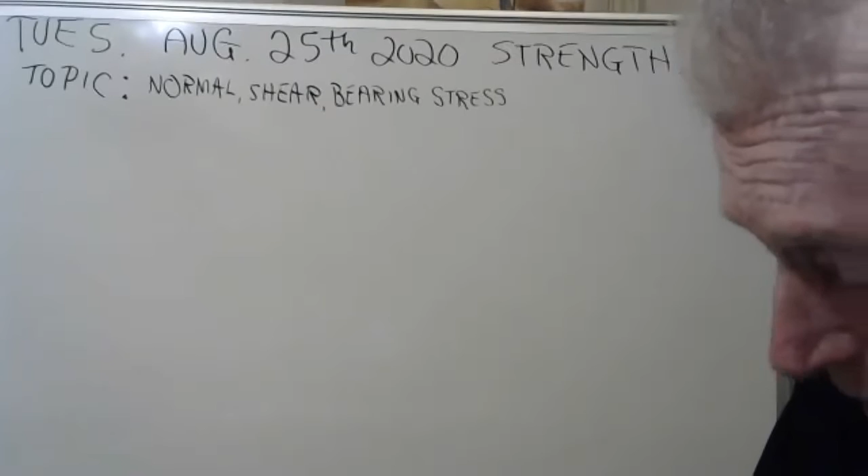We're going to talk about stress. That's the big topic in this class, you know, stress.

Hi, Mr. Griffin. Hey, good morning. Is that my friend Ashley? No, this is Mohammed. Who was that? That was Mohammed. Hi, Mohammed. Hi. Let's see who else we got here.

So, can you go over the homework problem 1-11? Now Mohammed wants to talk about 1-11, right Mohammed? Sorry, 1-14, not 11, 1-14. Let me find it, just a minute. What page is it? Hold on. Page number 55. Thank you so very much.

You're welcome. Now it's part of your homework, but I don't mind, we can talk about homework, it won't hurt us any. I can do the whole thing, or I can just answer part of it. What seemed to be your problem with 1-14?

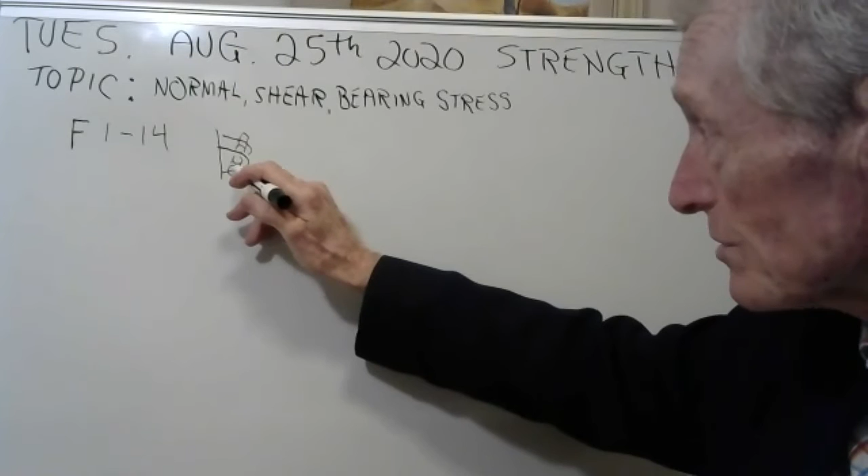Yeah, there's a connection here at A. There's the artist rendition of it, and see, it's got two brackets. Is that showing up on there? Yeah, it's got two brackets, and then the pin goes through those like that. Kind of hard for me to draw that, but I'll try. See, there's a pin through there, and then there's this member. There's another member that's coming out this way. That's AC. AC is out here.

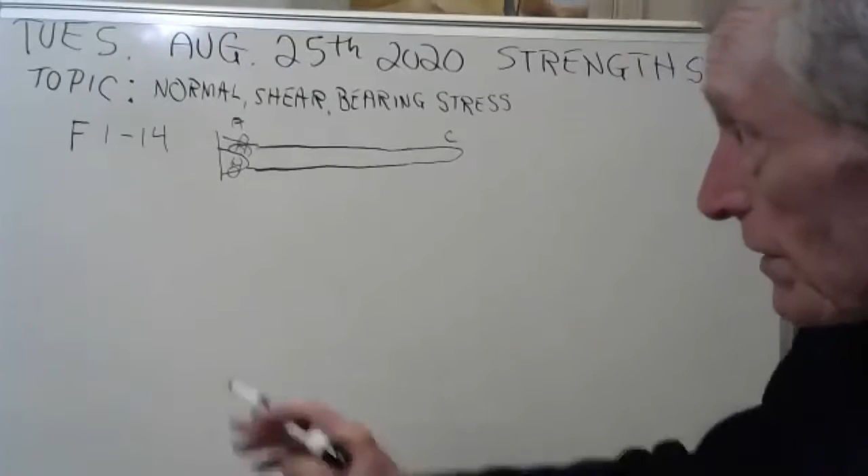Kind of hard for me to draw there, but I'm trying. Do you see how they have two brackets? And so when you go to get the shear, trying to remember what the force was there. Let me see if I can remember. I think you have 800 pounds and 600 pounds at A.

And we can go through that if you want. But see, if you have 800, 600, and you take the square root and do all that, you will get 1,000. So to get the shear stress at A, you take 1,000 pounds, and you have to divide it by the area. But see, you have two areas because there's two brackets. So you go 2 times pi, 0.25 inches squared, over 4. See, you have two of them because you have two brackets. And when you do that, you'll get your shear stress.

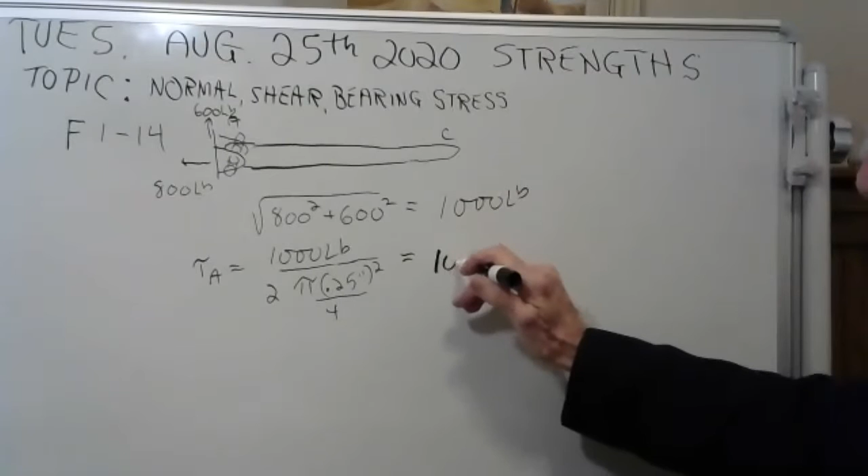Well, I got an answer. I wonder if it's right. I'm getting 10186 pounds per square inch.

Let's look in the answer book and see what the answer is to F1-14. They said the shear stress at A is 10.2 K. This is wrong, this is pounds per square inch. They said that it's 10.2 KSI. Well, that's what that is.

Hey, we got the answer in the back of the book. How about that? I skipped a bunch of stuff there, Mohammed. Are you happy with that now? Do you understand it now?

Yes, it was just confusing because in the diagram it wasn't showing that at A there's like two pins, it was just showing this one pin. That's why I was confused why they're dividing by 2. You okay now? Yeah, I'm okay now.

Anybody else? I can go through it more if you want. Just speak up, anybody that needs help. I've got a wonderful class here. Let's see who we got here. Oh, big class. Muhammad, Alex, Nicholas, Ashley.

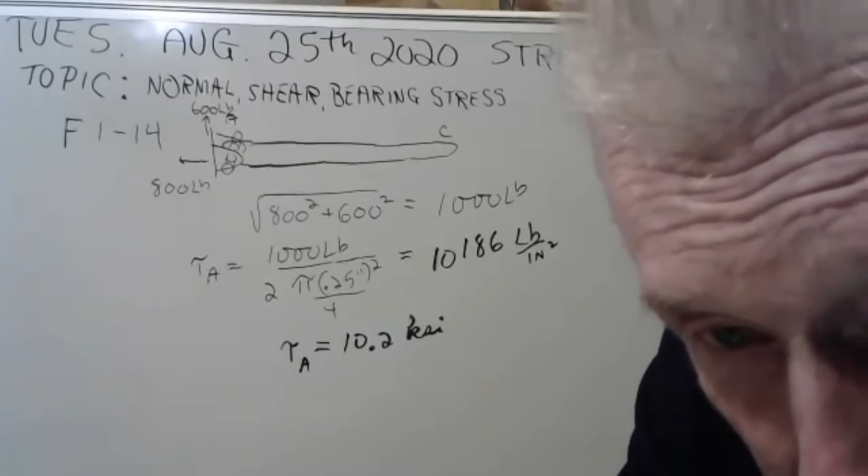Why did we take the magnitude of 800 squared plus 600 squared? Why did we do that? Do what, Mohammed? Why did we do what? Why did we take the square root of 800 and 600?

Oh, okay, well I'll be glad to show you that. And look at all these wonderful students - Noah, Julian, Jackson, Darren, Chase. Let's show you that.

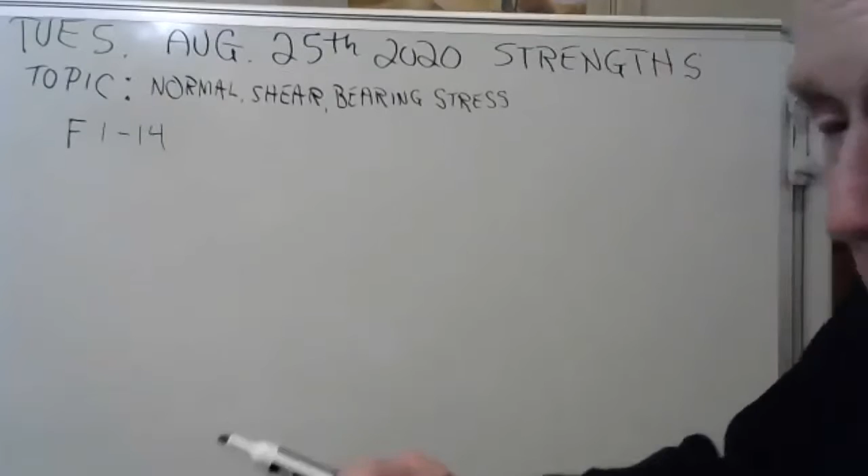Right now I'm helping you with your homework there. However, just a minute, when's that homework due? Let's see - F1-14, oh that was due last night at midnight. So that's okay, we'll go over it. But it was due last night at midnight, I believe.

But see, what you have to do is find the external forces first. So here's this. Oh gee, did I forget my protractor? Doggone it. Well, I can use this ruler here.

Now you know, when you do your work, you're supposed to have some kind of engineering paper. Now I don't think you can see, but this has got a grid on it, it's real cheap graph paper. It doesn't show up on there, sorry. But I bought a pad of this for 88 cents at Walmart, or you can buy that expensive engineering paper if you like.

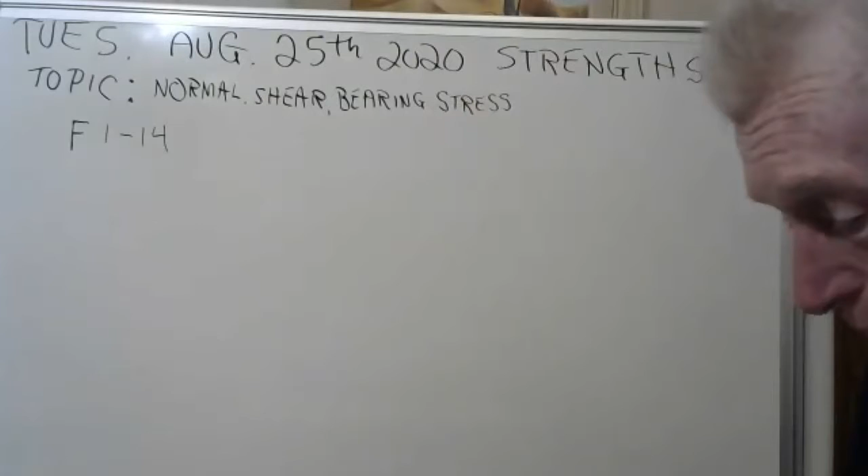But first you have to find the external forces. Now the external - if this is 4 feet, let me draw that. Okay, 4 feet. Well, we use inches, I guess. Okay, there's 4 inches, and then there's 3 inches down here. That puts me to right there. And here's your other piece right here.

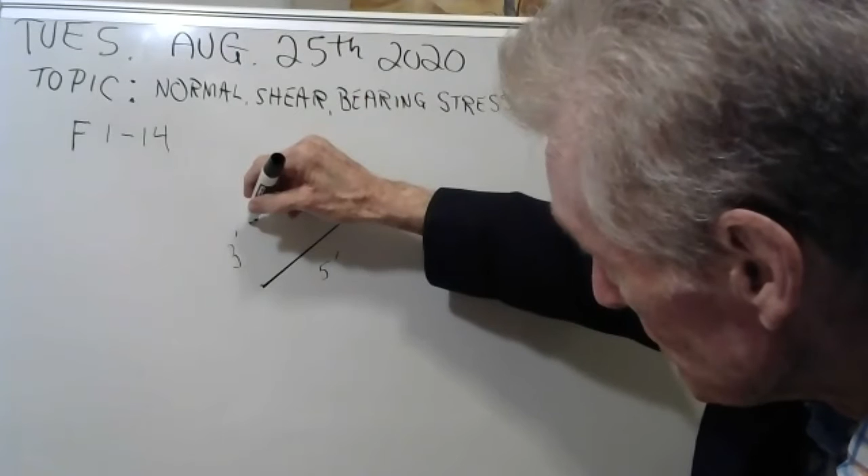See, this is 3 feet, this is 4 feet, and of course that's 5 feet. That's your 3-4-5 triangle. And here's your double brackets, remember I was telling you about those? Yes, those double brackets there. There's a single bracket here. There you go. And then there's another member right here. Let's label all this stuff A, B, C, D, and E.

Okay, I did it to scale. Do you do your work to scale? Well, you're supposed to. Now let's find all the external forces. See, first you find the external forces, or external loads, you could call them. And then from there we'll go to the internal loads. But first you have to find the external loads.

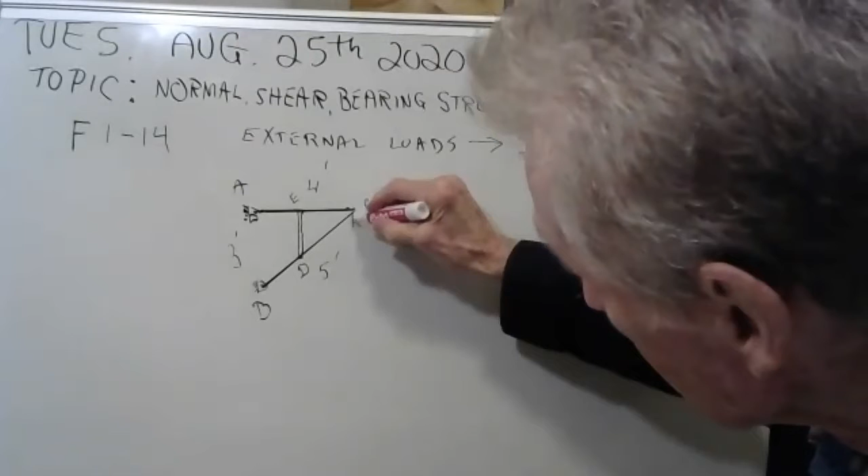Now I like to put my forces in red, so I've got a red marker here, and they said this is 600 pounds. Does that show up red? Kind of.

Now wait a minute, I goofed up on this. This is not a bracket, this is a rocker. It's a rocker, and it can only give you a normal force. It can't give you an up and down force, it can only give you a normal force. So I'm going to draw the normal force in red. And then the other force has to go here.

Do you remember me telling you, you draw your free body diagram and you look for zero, two, and three force members? Well, this structure is a three force structure. Three force structures or three force members are either concurrent or they're parallel.

Maybe I should write that down again for you guys. Three force structures are either concurrent, or else they're parallel.

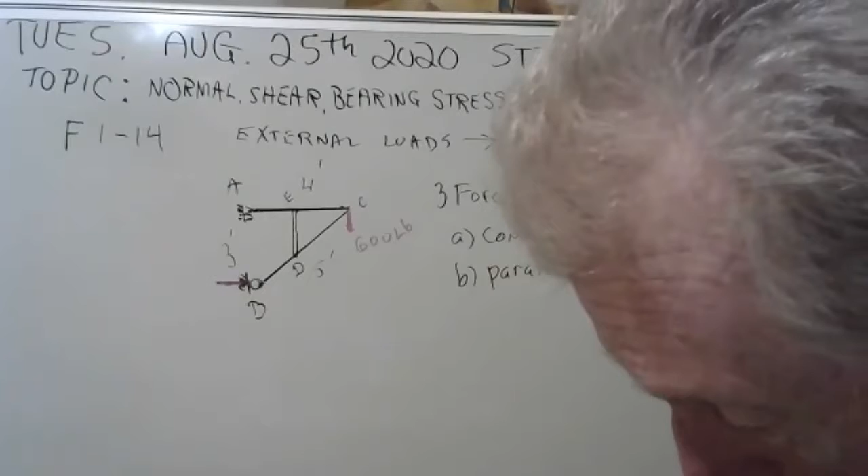Now let me ask one of my excellent students here. Let me pick on Shane. Unmute, Shane, and I want you to tell me something - I want you to tell me what this word means, concurrent. Do you know what it means, Shane? And if you don't, it's not the end of the world. I'm not sure. That's okay, we'll pick on Noah. Unmute. Do you know what that word concurrent means?

Unmute Noah. Earth calling Noah.

Does it mean they're all through a point? Yes, good going Noah, proud of you. Now do you see how these forces here, these two forces here, go through that point right there? That's the concurrent point. If you have a 3-force structure, all the forces have to go through the concurrent force point.

Well, that means the force at A has to go through the concurrent point. And so A is doing this. There's your force at A.

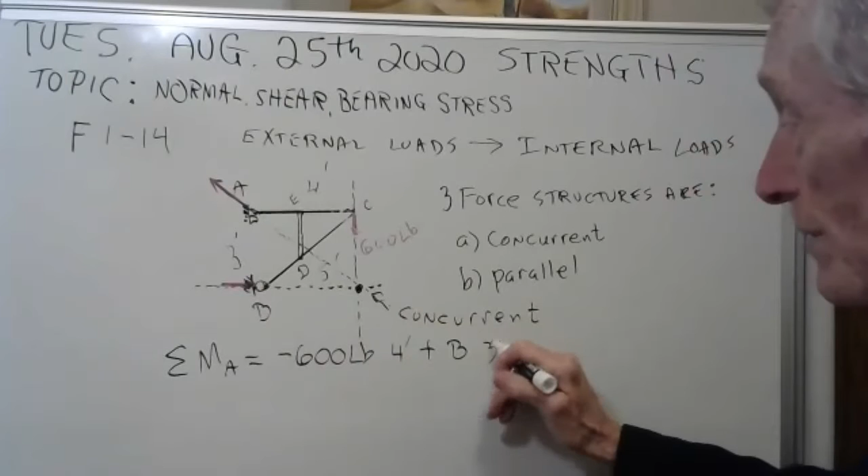Now we're going to find out what those forces are. The way you solve for forces is you take the moments about A, and you have a negative 600 pounds times 4 feet, and a positive B times 3 feet equals 0. You solve that, and you'll discover that B has to be 800 pounds.

Now what that means is the component of A has got to be 800 pounds going to the left. If this is 800 pounds going to the right, this has got to be 800 pounds going to the left. Now you see that 600 pounds going down? That means A has a component of 600 pounds going up.

Now Mohammed asked me how I knew that A was 1,000 pounds, and I wrote it out for him. I took the square root of 600 squared plus 800 squared, which is 1,000 pounds. He wondered how I got the 1,000 pounds. Well, that's how. These are the components at A, so that means A is 1,000 pounds.

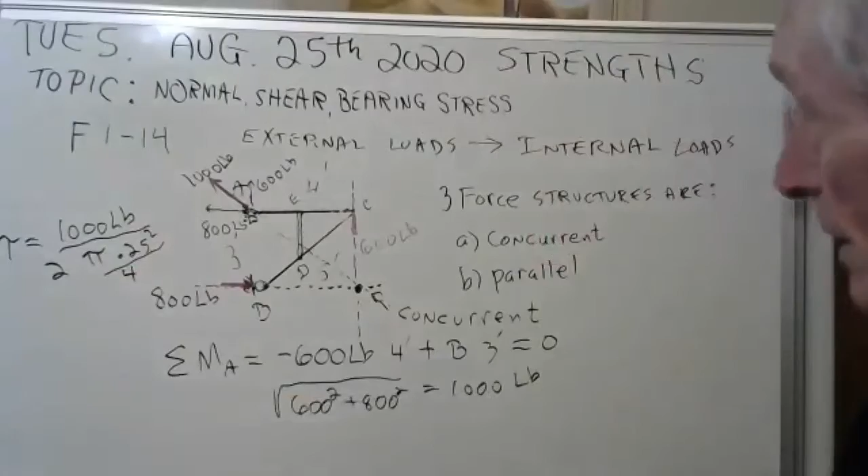And so when you go to find the shear stress at A, it's 1,000 pounds divided by 2, because there's 2 brackets, over pi times 0.25 squared over 4, and you will get the answer. We had it on the board, but I erased it. Let me do it again. 1,000 pounds divided by... okay, I got an answer. I got 10.2 KSI, and that's what the answer book says.

Mohammed, do you understand now? Yes, I got the problem, sir. Thank you so much. Yes, thank you. Anybody else?

Anybody else? So you're all happy? The topic today is stress. See, we found the stress, it's 10.2 KSI. But what does KSI mean?

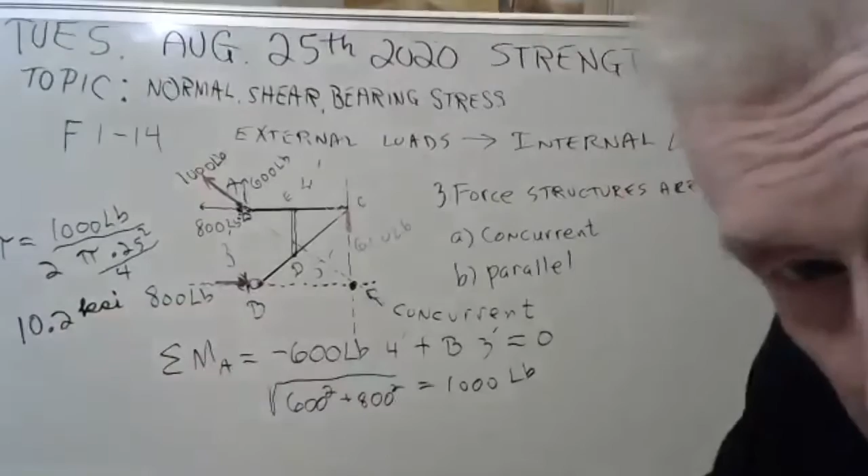Let me ask one of my excellent students here. How about my friend Samuel? Samuel, unmute and tell me, what the heck is a KSI? Is it kilopounds per square inch? That's it, he's got it. It's 1,000 pounds per square inch. Good going.

Excellent. Anything else from anybody before we have more fun?

No? Notice there's a method in this stuff. You make a free body diagram to scale. Hey, I measured that stuff, I got me a ruler. Look, I got a ruler and I measured stuff. That thing is done to scale.

And then what? Then we found the external forces in this case, and I put them in red. Put your forces in red. Then I looked for three force members. Well, the whole thing is a three force member, so it's concurrent. That helped me, see? That helped me a lot. Now I was able to figure this force at A is 1,000 pounds.

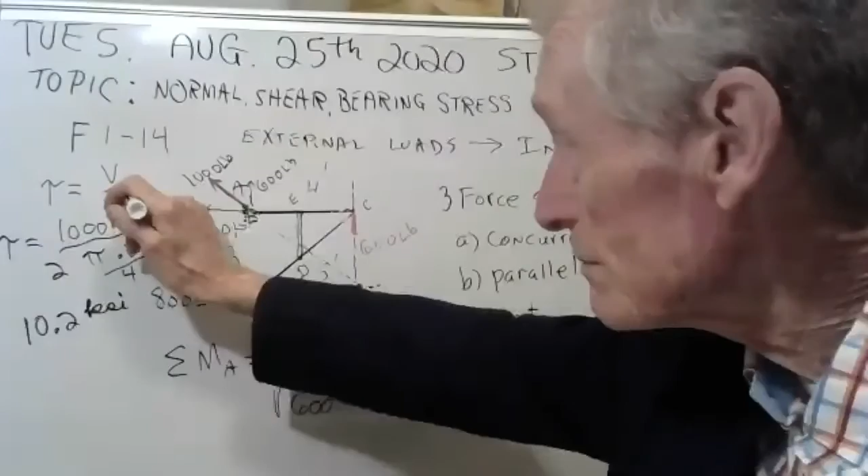It has components. And then you can go for internal loads. Now what they wanted was the force on the pin. Well, there's 1,000 pounds on the pin. That's internal, and so you can get this shear stress on the pin. You know the formula, you know how to do shear stress. It's V over A. That's internal. Shear is an internal force, and shear stress is force divided by area.

Okay, well, if you're happy with all that, we'll do something else. Here's your chance, go ahead and ask me something. Anybody? Otherwise we're just going to keep doing stresses here. Okay, well, let's do this one. Make some room here, but that's the plan.

Which one do I want to do the most here? Let me think.

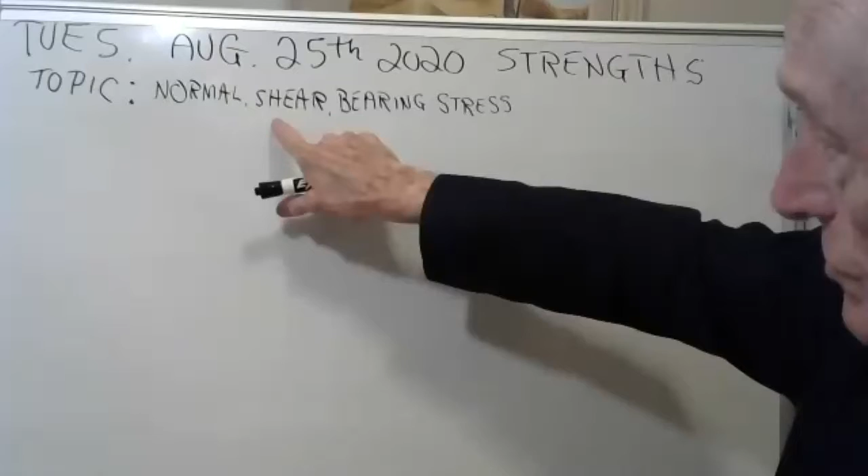You've heard of normal stress and shear stress, but I don't think I've told you about bearing stress. Well, let's talk about bearing stress. That won't hurt us any.

Look at problem 171. Let me see if I can find that. 171. Hey, there it is, I found it. We're going to look at problem 171, and it's got bearing stress.

It also has normal stress. But they've got a pin there. It's a bolt. No, it's a bolt. And it's got a nut and two washers. Okay.

Bearing stress is 2 KSI. Tensile stress is 18 KSI. That's the maximum. We want the tension in the bolt. We want the maximum allowable tension in the bolt.

Well, all right. Let me draw this bolt. Now there's a bolt. Artist's rendition of the bolt here.

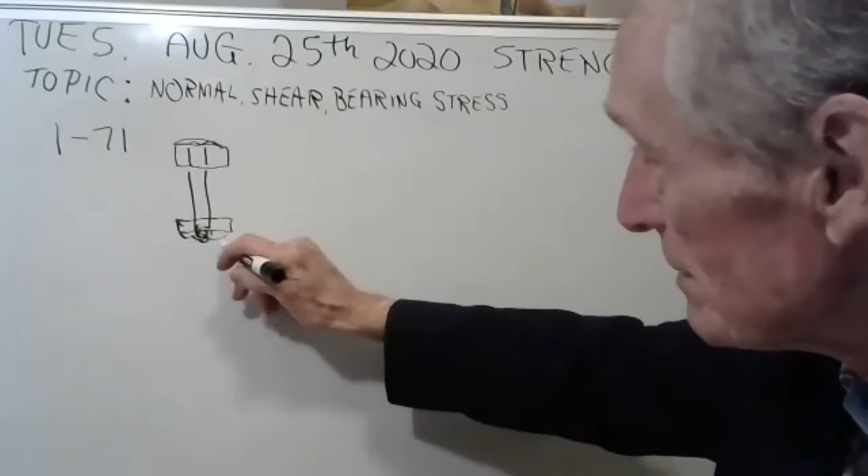Of course, there's going to be threads on the bolt, and then there's a nut. There's a nut. Of course, those would be dashed lines there inside, wouldn't they? That kind of gives you a feel for it. That would all be hidden away there.

Let's look at the forces on that bolt. Oh, wait a minute, I forgot the washer. There's a washer here and another one here, right? Yeah, there's a couple of washers here.

Okay. Now I get the feeling like maybe we're tightening this up. See, there's a screw here, and there's a nut. Here's the nut, and we're tightening that nut up, tighter and tighter.

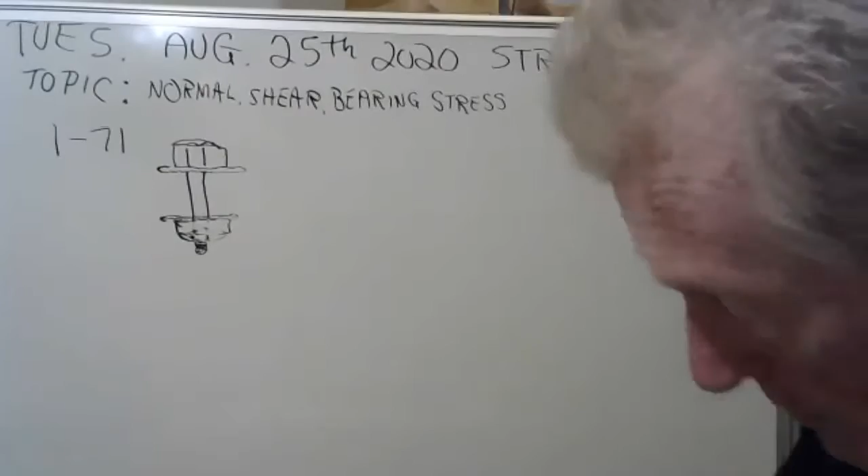And you know what that does? That stretches the bolt, because you've got these boards here. You got this board here, and you got this board here. And you're tightening this nut, and it stretches the bolt.

In fact, the bolt comes down a little bit. It comes poking down through here a little bit as you tighten it, as you screw that nut, and it puts a lot of tension on the bolt.

Okay, that's normal stress. The normal stress on the bolt is going to be the normal force on the bolt divided by the area of the bolt. Now let me read this. And they said that the allowable tensile stress is 18 KSI. Well, that's this here. That's their maximum that they're going to allow, is 18 KSI.

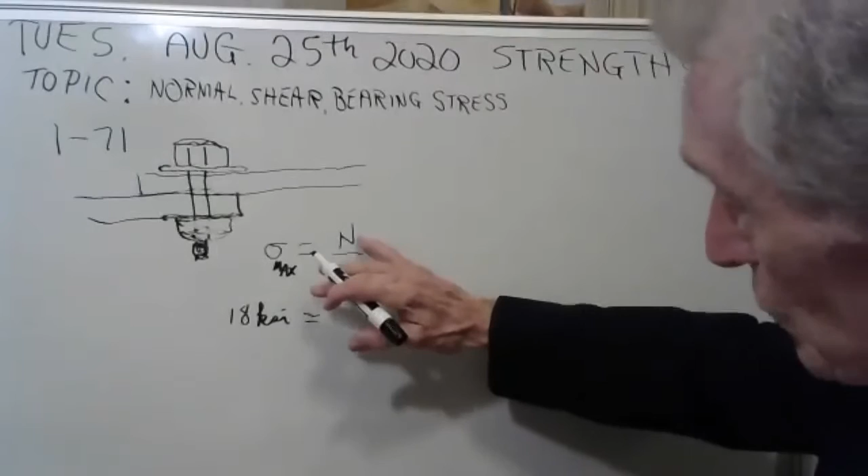And what are we supposed to find? Determine the maximum allowed tension in the bolt. Well, that's what this is. This normal force is tension. That's tension. It's a force.

In this case, pounds. So we're going to find it. Now the area of the bolt is pi over 4. Now what's the diameter of this bolt? 0.31 inches.

So we have us an equation here, and we can find the tension in the bolt. They don't want us to tighten it any more than that. And they want to find what that maximum tension is. Well, you got calculators, you can do this as well as I can. Go ahead and do that. I'll call on one of you.

I'm going to do it. I'm going to find this tension. You can put T there instead if it makes you happy. But it's tension. Here goes. You do it.

Well, I found the maximum allowable tension in the bolt on my calculator. And let me ask my friend, Noah, unmute. Have you got that yet, Noah? Have you plugged this in and gotten the maximum normal force there? It's tension, Noah.

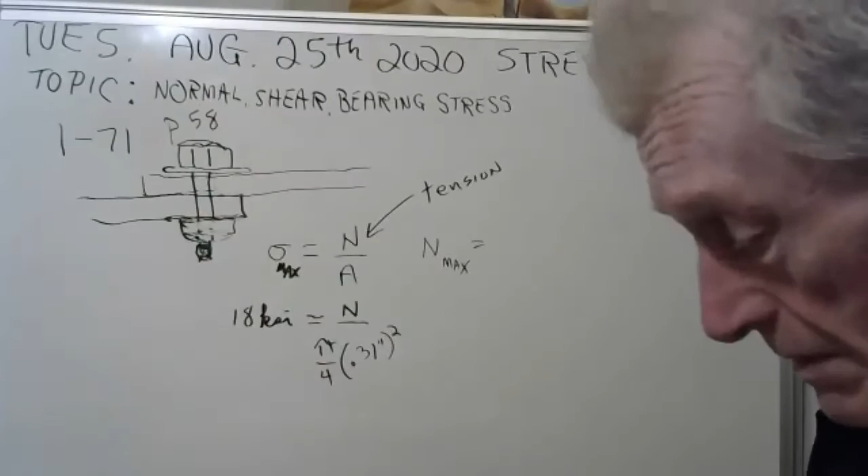Well, that's not what I got. Let's see, we're trying to solve for this n here, Noah. What you do is you take 18,000 and then you multiply by this stuff here. Oh yeah, go ahead and do that. And tell me what you got.

I got, let's see, 1,358. That's what I got. Now those are in pounds, Noah.

Now, if they wanted it in kips, Noah, do you know what a kip is? Yeah, isn't that 1,000 pounds? It's 1,000 pounds. So there's the answer if the tension in the bolt is the problem.

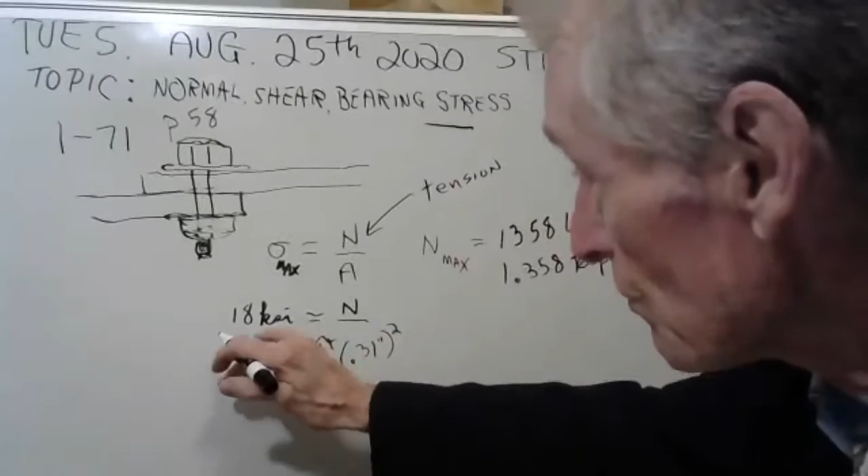But we also have to look at the bearing stress. See, this is normal stress here, and in fact it's tensile stress. We just looked at the tensile stress, and we found that if you have this 1.358 kips, you've just maxed out the tensile stress, and you might have a problem with the bolt. But we also have to calculate the bearing stress. So let's do that.

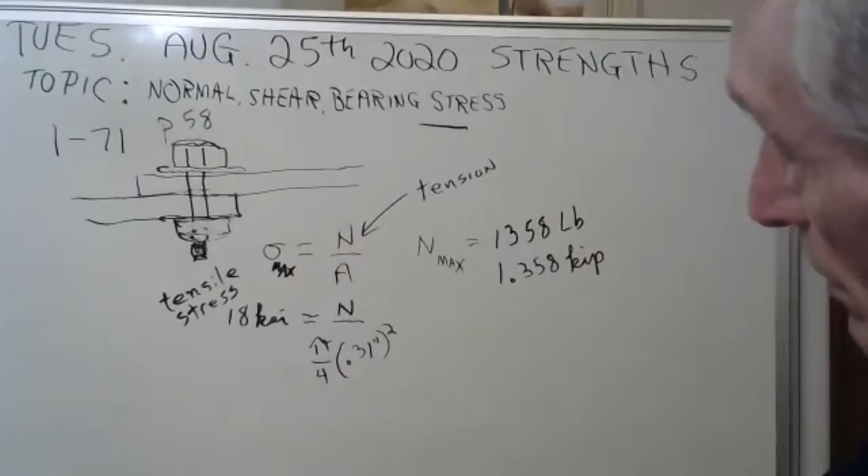Now you see this washer here? As you tighten that bolt and start squeezing these boards, they look like they're made of wood. Is it wood? Board. It says board, so they're made out of wood. What happens is, if you tighten it too much, you'll start kind of making an impression in the wood. Here, I'll try to draw you what I'm talking about here. I need some room here.

See, here's this board, our artist's rendition of this board. As you tighten that bolt, that washer will push itself into the board and make a kind of indentation. It's hard to draw, but our artist view tried to show it pushing into the board, and if boards are pretty soft, it might just make an impression in the board there.

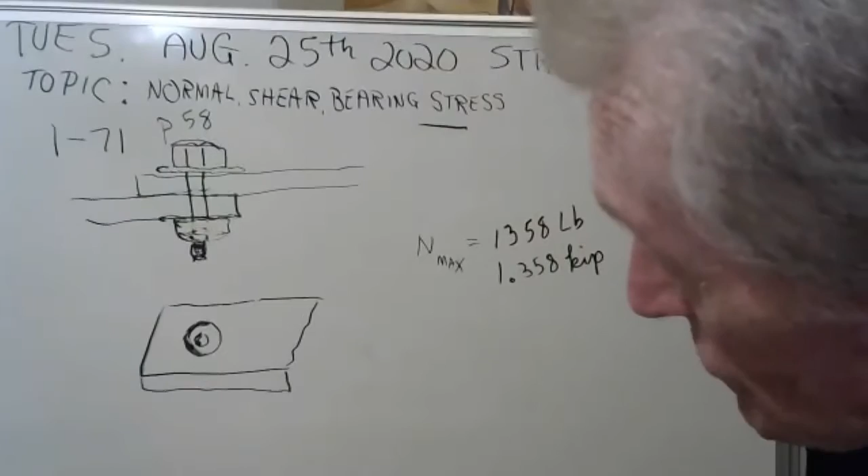And they call that bearing stress. Bearing stress is when you have a normal force acting over an area, and on that board it can make an impression that looks like a washer shape on the top of the board. Of course there would be one here too, there's a washer down the bottom, so there would be an impression on the bottom board as well. I hope you understand that.

And here's the formula for bearing stress. It goes like this: this is your bearing stress, I'll just call it 'bear.' That will be the normal force divided by the area of your washer. Now the area of the washer is pi over 4 times 0.75 squared minus 0.5 squared.

They said the outside diameter is 0.75, inside diameter is 0.5, and they told us the maximum bearing stress is 2 KSI.

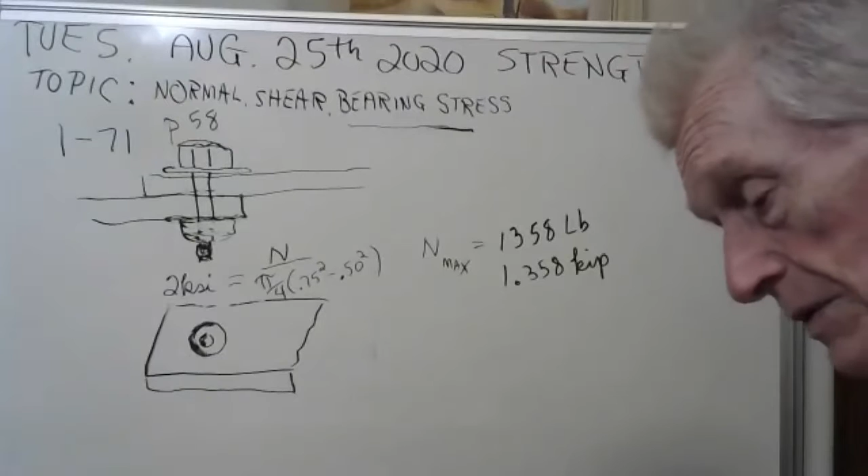So now we have this lovely equation here, and we're going to solve for the maximum force in the bolt that you can allow so you don't wreck the boards. You don't want to have a washer-shaped hole there in the boards. So get your calculators out and do that, let's see what you get. I'm going to try it too, and I'll call on one of you. Get your calculators, solve for the normal force.

And we'll get the maximum force that you can have in your bolt. I got an answer. Now let me go to one of my wonderful students here, Julian. Unmute, have you got that yet, Julian? I got 490.87, that's what I got. We'll just round it off.

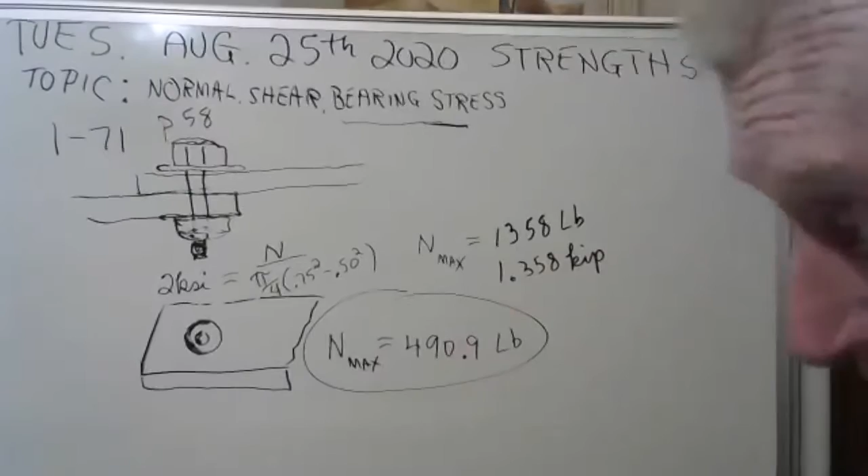So if you get 490 pounds of tension in that bolt, you're on the verge of having a problem with bearing stress. Now, of these two, the 1,358 pounds or the 490.9 pounds, which is the correct answer? Well, this is the correct answer because as you tighten that bolt, you'll get to a tension of 490 pounds long before you have 1,358 pounds. So the problem in this case is with the bearing stress. It's not that the bolt has a problem, it can handle a lot more tension, but that soft wood is going to be wrecked by the bearing stress, and this should be the answer.

Okay, let's look it up, problem 1-71. Go to the back and we'll see how we did. Here's what the answer book says: they use P, I don't know why, but some books use P as just a dummy variable for a normal force, and they got 0.491 kips. Well, that's the same thing as what we got. We got 490.9 pounds, and the book says 0.491 kips. Yay, we did great.

So now we've talked about bearing stress. Mr. Griffin, do you know why we subtract 0.75 from the... minus 0.5? Oh, thank you for asking.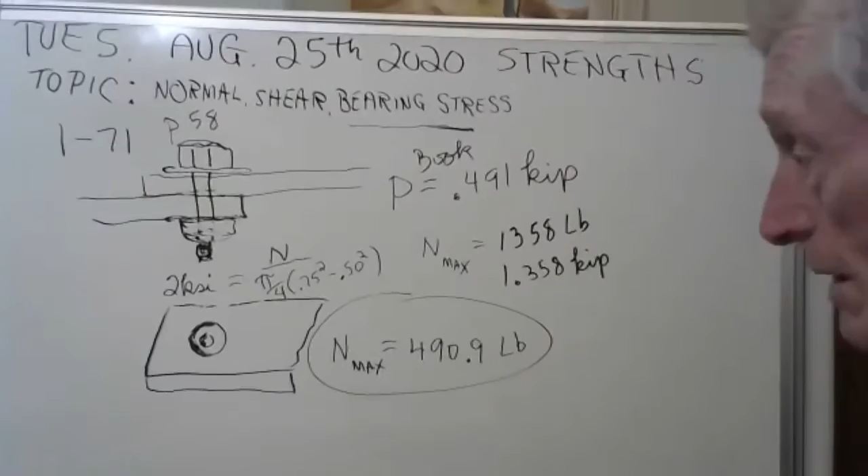See, we're trying to find the area of a washer. Now if you just had a circle, the area would be pi over 4 times 0.75 inches squared. But we have a hole in it, there's a hole in this circle, it's called a washer. So what you have to do is the area of that washer is pi over 4 times 0.75 squared, minus the area of the hole. This is the area of the hole, and this is the area of the outside circle. The hole isn't there, it's made of metal, it's called a washer.

Do you understand, Mohammed? Yes. I'm waiting for that yes. Yes, I'm saying yes. Yeah, is that yes meaningful? Yes, you got it. Yeah, I got it. Yes, all I got right. All right, good. Okay, well let's do something else, that was fun, unless there's a question.

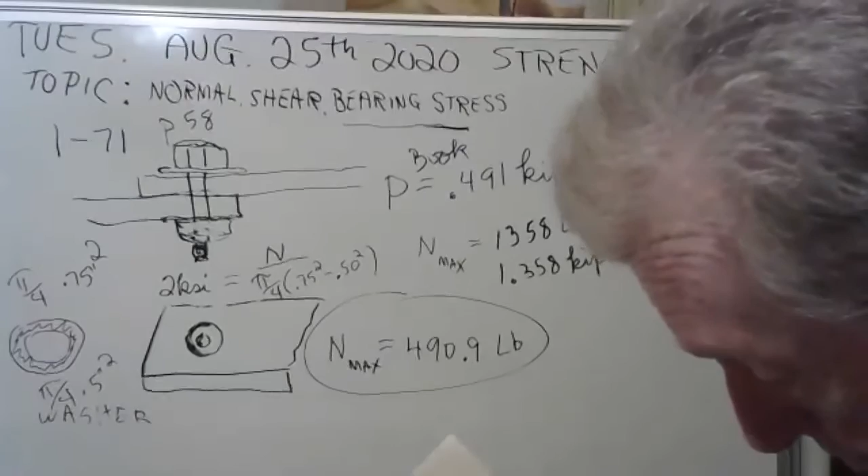Okay, we'll do something else. Let's do this one here.

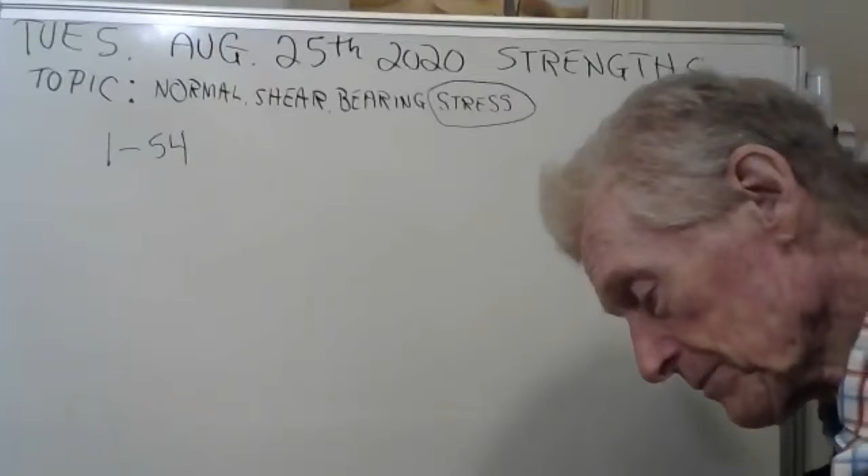Okay, now this problem here is 1-54. Before I do 1-54, let me go back and show you some basics here.

Let's suppose you had a rod under tension. Got a rod under tension. Let's call this area here A sub 0. It's a perpendicular cross-sectional area.

And let's section this. We're going to section it like this, maybe, yeah, like that. And there, this would be internal. We'll put a dash line there. See these dash lines?

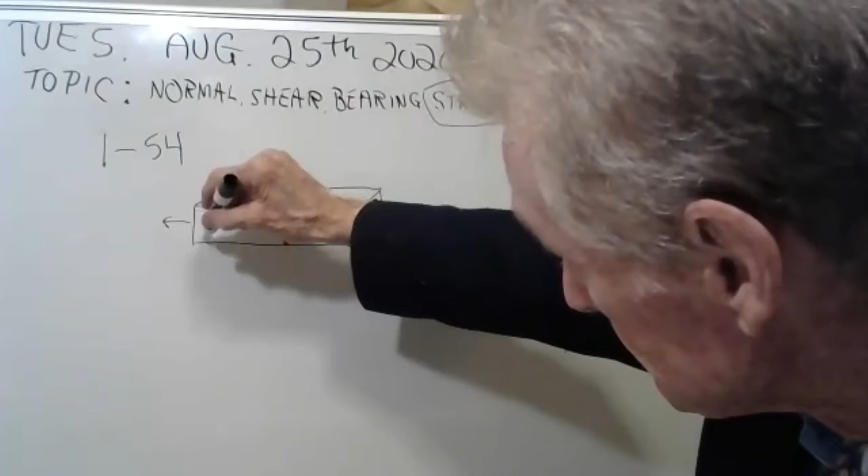We want to find the normal force and the shear force, I'm sorry, the normal stress and the shear stress on an inclined area.

Okay. Now I picked an angle here of 30 degrees to make this fairly easy for us. See, I picked an angle of 30 degrees. And let's just pick this angle. Let's just say this force is P. The book likes to use P for normal forces.

The normal stress is going to be, well, we know what it is. It's the normal force over area. And the shear stress is the shear force over area. We know that.

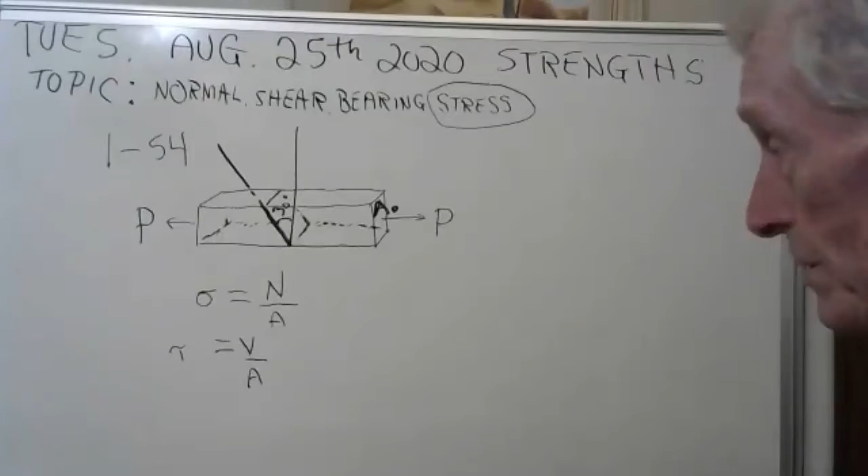But if it's at an inclined plane like that, how do you find the normal force? Well, see, the normal force is going perpendicular to that area like this. See that normal force? And the shear force is going parallel to the area like that.

Let me draw those forces separately. Let's suppose this is P right here. So you can break this down into components. This is called the normal component. And this is called the shear component. And those two will have to add up to P.

I'll tell you what the normal component is. It's P cosine, in this case, of 30. See that angle 30? That's that same angle 30 there. Can you see that? And this one here is P sine of 30.

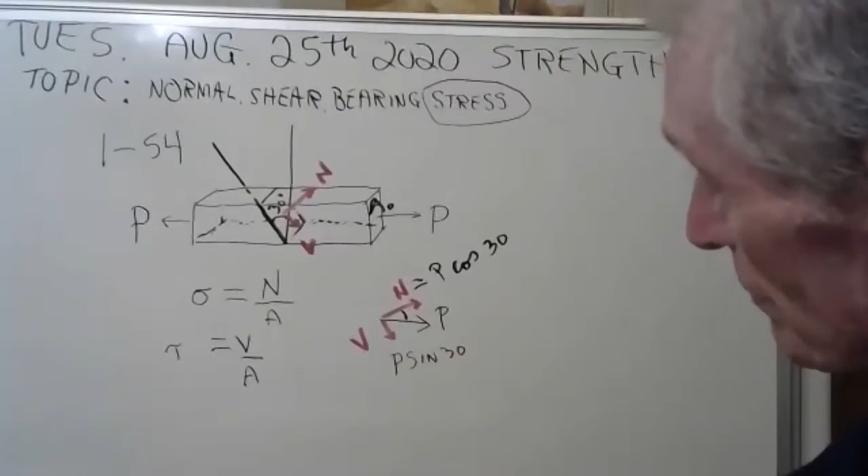So we made some progress. We know that this is going to be P cosine of 30 divided by the area, and this is going to be P sine of 30 divided by the area. But see, this area here is bigger than the cross-sectional area. This area here is equal to the cross-sectional area divided by the cosine of 30 in this case. You could show that with trig.

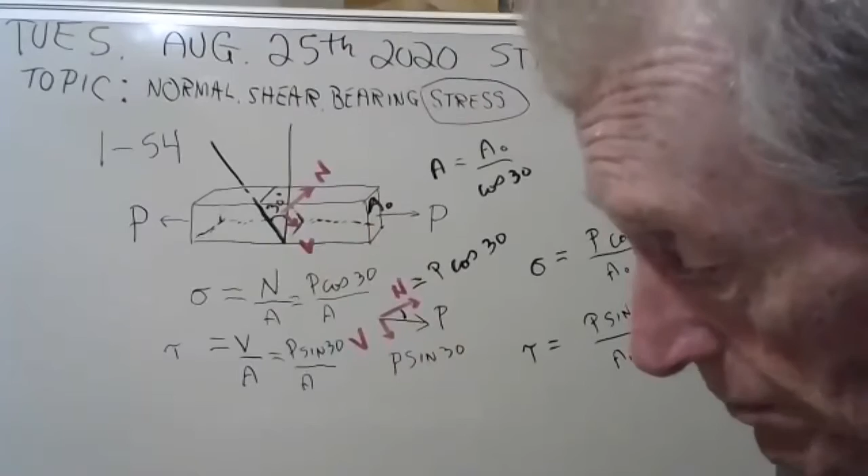And so when you solve this, you get the normal stress is P cosine squared of 30 over A sub 0. And tau is going to be P sine 30 cosine 30 over A sub 0. I skipped a step there. But I'm going to give you the equations for a slanted area internal to a member under tension.

And in fact, this is the equation where theta is just a dummy variable. So let me write that for you. And then we'll work a problem. But I needed to go back through that with you.

The normal stress on this slanted area is equal to the external force cosine squared of theta, where theta is this angle here. See it? Divided by A sub 0. The shear stress is P sine theta cosine theta over A0.

Why don't you write these equations down in your notebook, someplace where you can get to them, and we'll practice them. We'll solve a problem.

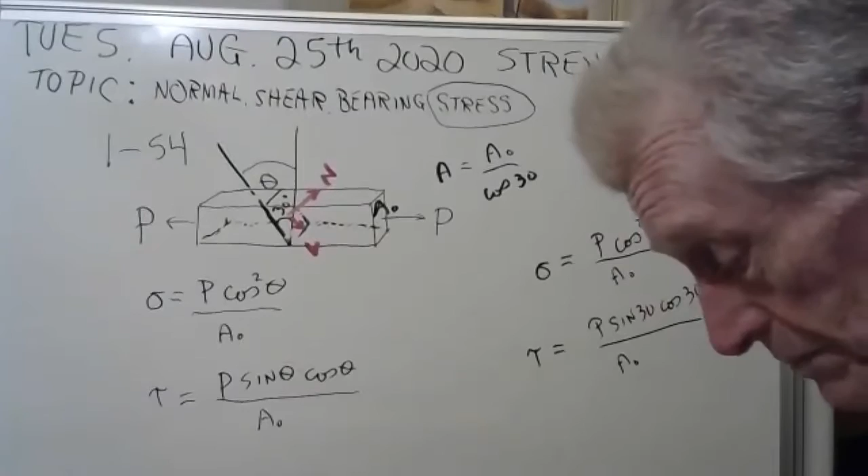I thought we'd solve problem 1-54 first, and then we can solve some others. Did I lose everybody? Give me some feedback. Are you okay with that? Yeah, it looks pretty good.

Okay, well here let's do this 1-54, or maybe another one, so that we can feel confident about this. We've got our equations now. Write these down. Write those equations down. Now this angle theta is, if you take a perpendicular cross section, the angle with whatever internal surface area that you want. You've got to know that there's shear stress and normal stress inside a piece like that.

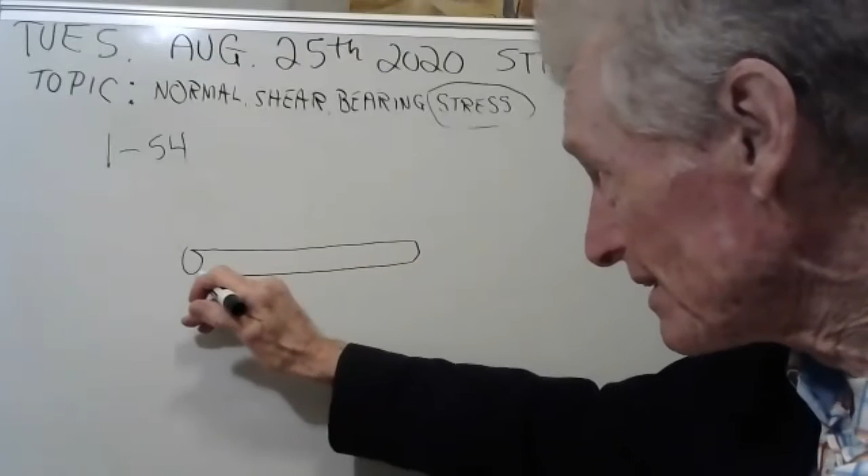Even if you just had a circular cross section and you put it under tension, get yourself just a steel bar, circular cross section, and pull on it on both ends. You have normal force inside, obviously. Obviously, you have normal force inside, but did you know there's also a shear force inside? And there's normal stress and shear stress inside.

It turns out the maximum shear stress is at an angle of 45 degrees. The reason for that is your equation goes like this.

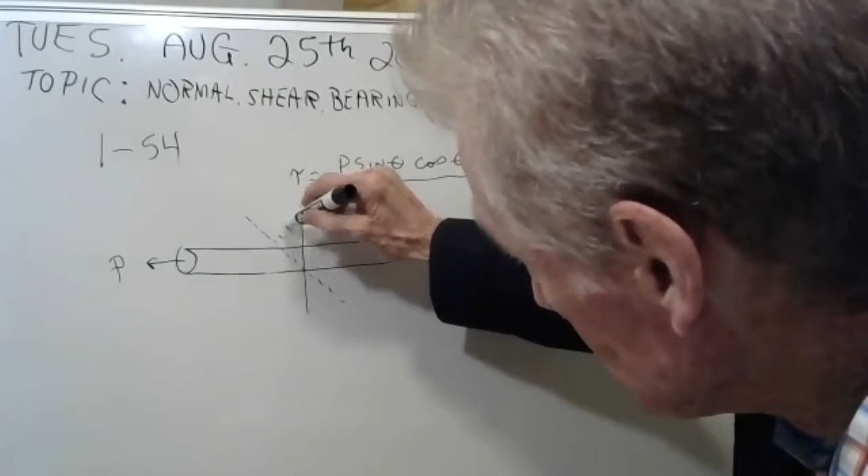If this angle is 45 degrees, you will get your maximum shear stress.

Let's figure it for some different angles. Suppose here we have the angle, and we'll calculate the shear stress just for fun. If the angle is 0, you all know what that would look like—that's where you just cut it straight, there is no slant. And the sine of 0 is 0. So if theta is 0, there is no shear stress.

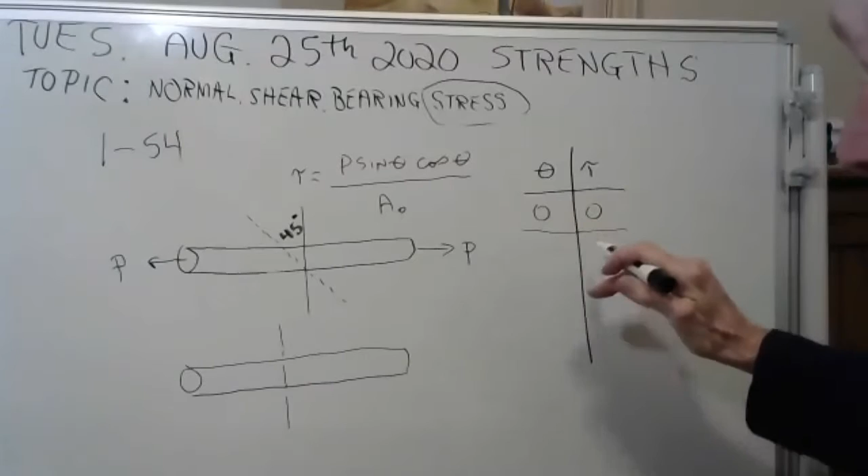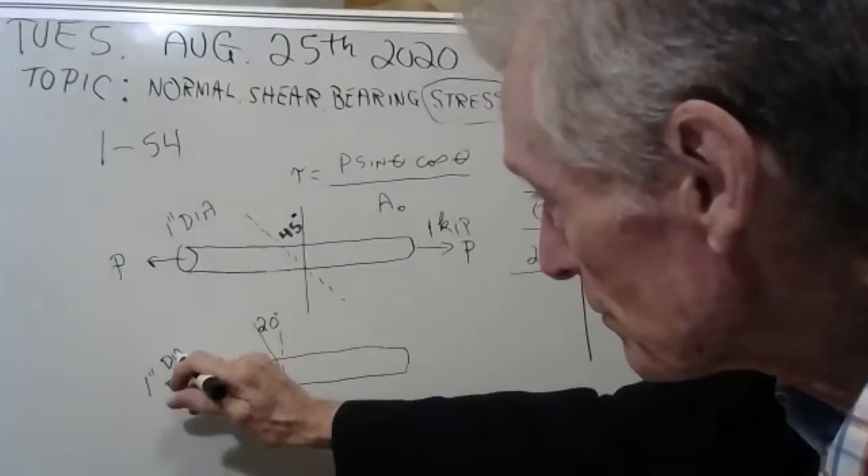But let's try some other angles, like maybe 20 degrees. Let's give some actual figures here. Say this is 1 kip, and say this is a 1 inch diameter. You have a 1 inch diameter rod, you have 1 kip, and at 20 degrees—see that angle there at 20 degrees? It's a pretty small angle. We're going to figure out the shear stress if you had a 1 inch diameter rod with 1 kilopound of tension in the rod.

Okay, here goes. The shear stress would equal 1 kip divided by this—now this is the cross-sectional, perpendicular cross-sectional area, that's pi times 1 inch squared over 4—and this is sine of 20 cosine of 20. All right, let's plug this in and see what we get.

Well, I got an answer of 409. I believe it's PSI. I wonder if that's right. Did anybody else get 409? Yeah, there's 2 of us.

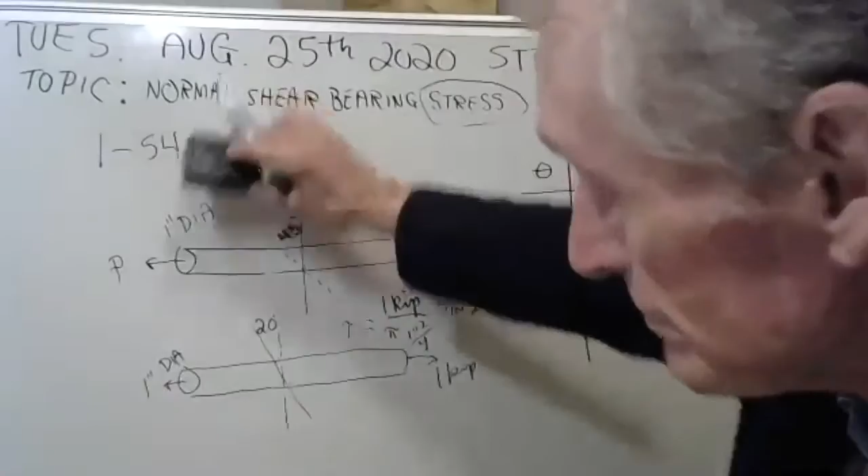Well, let's do 30 degrees. I need some room here. Then the shear stress is 1 kilopound divided by the perpendicular cross-sectional area, which is pi times 1 squared over 4, times—if you're doing 30 degrees—sine of 30, cosine of 30. That's it. Plug it in, let's see what happens.

Well, I got an answer—551 PSI. Did anybody get 551 PSI? Yeah, there's somebody.

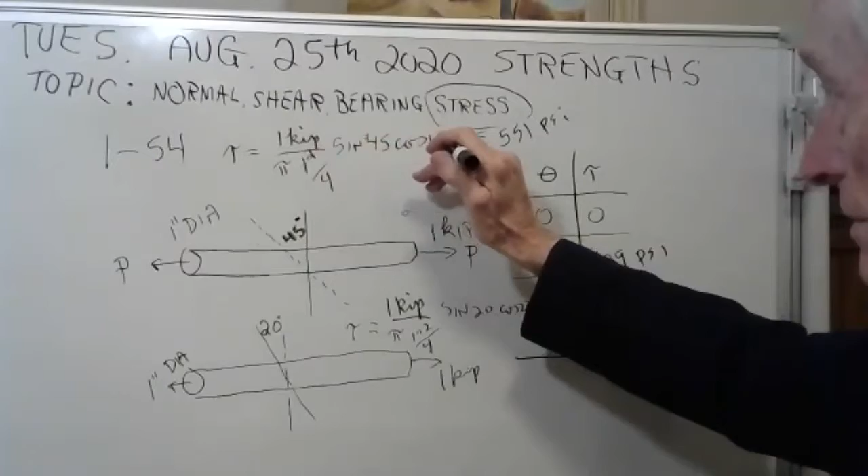Now let's do 45 degrees. This A0 stays the same, the 1 kip stays the same. The only thing that changes is this angle here. You guys work that out.

I want to find something that I'm going to show you in the book. We'll get back to this problem here in a minute—I want to do that problem, but I'm trying to help you understand this first.

I wanted to show you something in the book, but I can't find it. Let me keep looking, I haven't quite given up yet. Dang, I can't seem to find what I want, but I haven't given up yet.

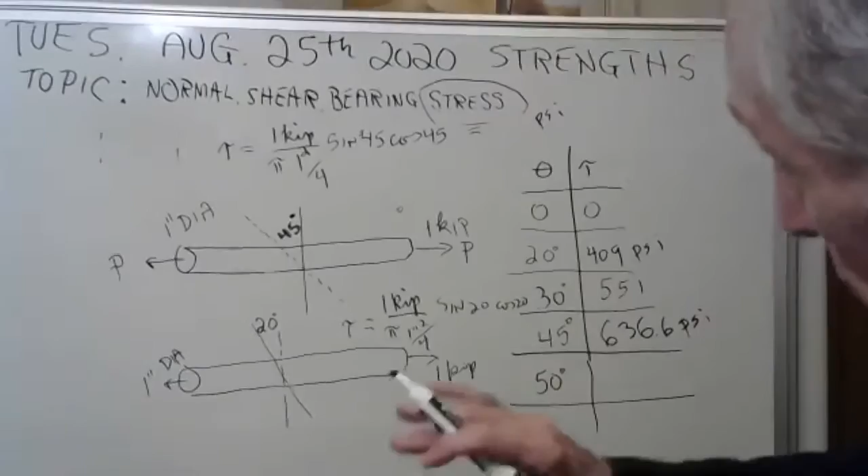Okay, well let's go to 50 degrees. We can keep on going, but this is the last one I'm going to do on this—it's going to go down is what it amounts to. But if you plug in 50, these stay the same, see? Plug in 50 and let's see what we get. Here goes: 1,000 divided by pi, and 4 times sine of 50 times cosine of 50. Did you get 626.9? I wonder if I did that right. Yes, yeah, and it goes down from there.

Now, we'll do one more. I lied to you, we'll do one more. If you go to 60, it's going to get even smaller. Here goes, I'm plugging in 60 degrees now.

I'm getting 551 now, PSI.

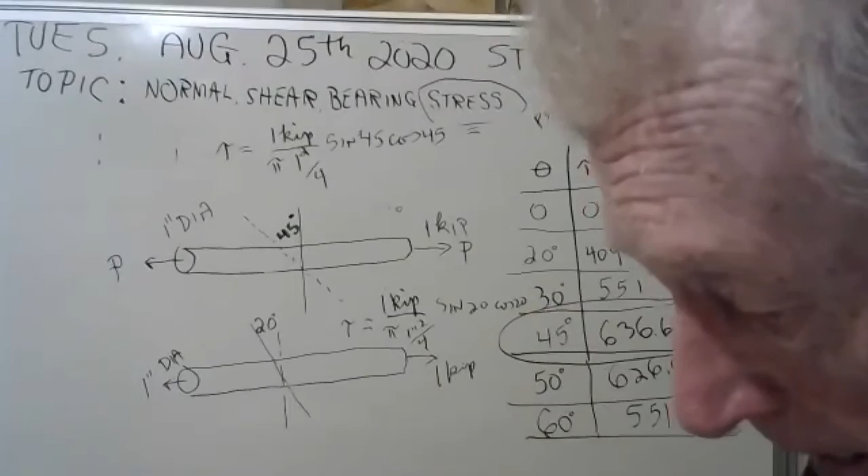Interesting. Look at here. The maximum shear stress in a rod under tension occurs at a slant of 45 degrees.

Now, in your book, on page 89, there's a picture of a steel rod that they have stretched. I'll try to draw you a picture here. If you don't have a book, you don't know what I'm talking about.

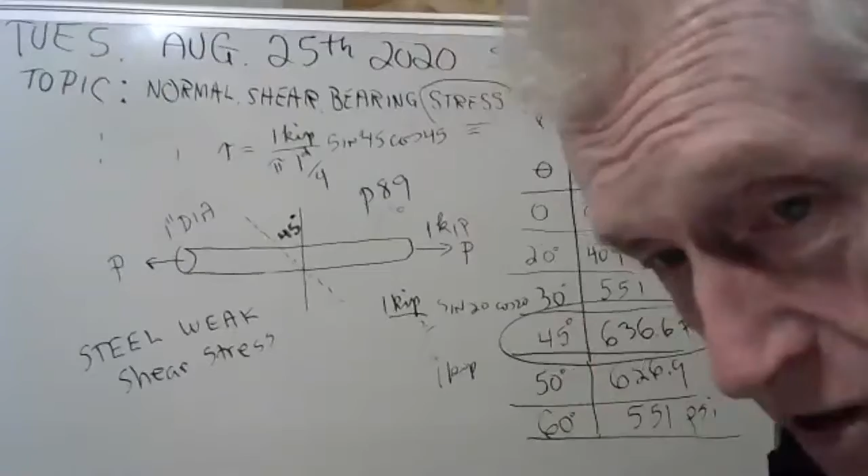But it turns out that steel is weak in shear stress. Steel is weak in shear stress. Now, steel is very strong in normal stress. Oh, it's a winner. It does great. But steel has a problem with shear stress.

And they took this rod and put tension on it. And if you look at it, they broke it into two pieces. Here's this rod, and it's kind of rounded off like that. And the other piece, well, actually, it necked down, and we'll talk about that necking down.

But this angle here is 45 degrees. Isn't that interesting? See that angle? And this angle here and here is at 45 degrees, either to the horizontal or the vertical. It's the same. And the steel fractured. It fractured at 45 degrees. You know why? Because it's weak in shear stress. The maximum shear stress occurs at 45 degrees.

Okay, any comments or question on that? Because I want to work this problem. What did I say it was? 145? I can't remember now. Anybody remember what I said? I think it was 154. Yeah, it's one. Thank you very much.

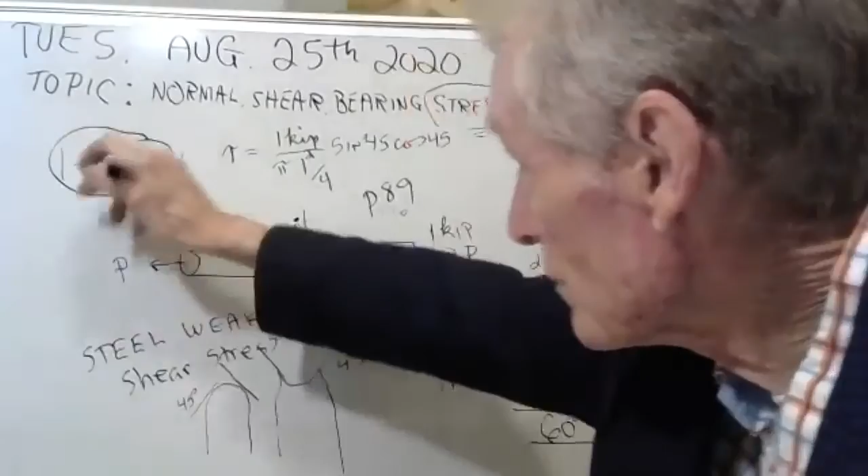It's one. We're going to do 154, but before I do, is there any comment or question on this formula? We're going to need this formula. I tried to show you where it came from. I'm not real sure that that formula is in your book, but if you'll write it down and have it ready in your notebook, let me write it again for you.

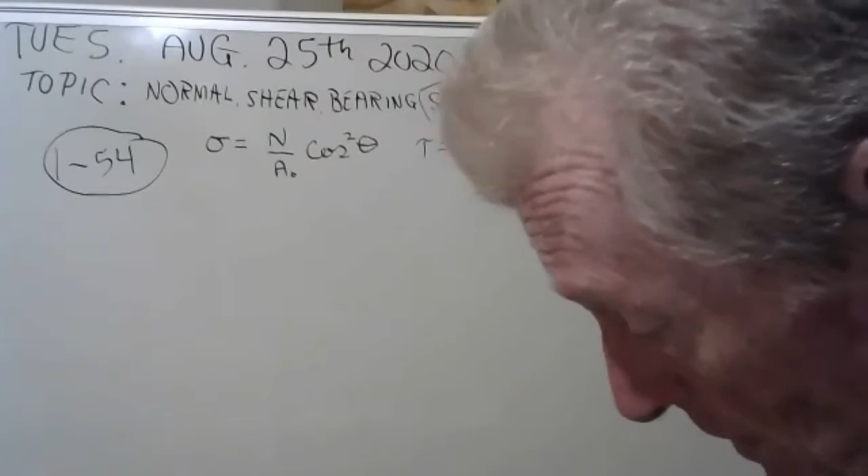I don't think the book tells you that formula, but you can always do it the hard way. On 154, what they have is a rod that's... I lost my page already. Help me, what page is that on? I need to know where 154 is. It's on page 43. Thank you. It's there, page 43.

Now this rod is 2 inches by 1.5 inches. It's 1.5 inches this way and 2 inches this way. Okay, there we have it.

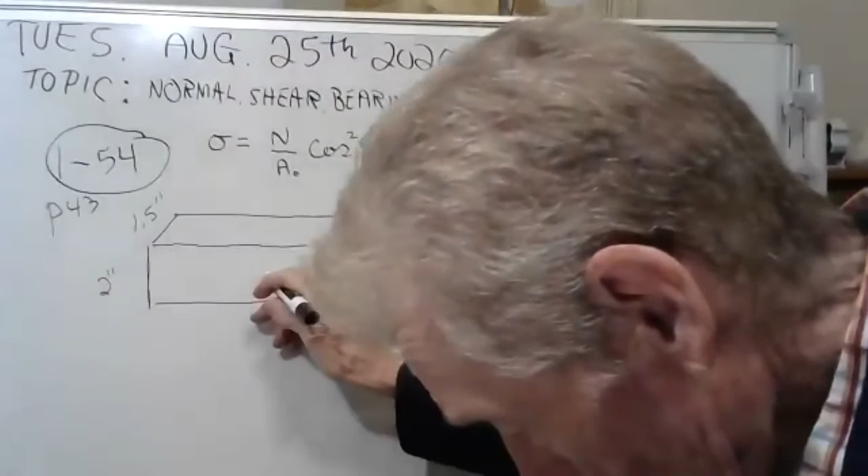And they're putting 800 pounds on it. And they have what they call a fish mouth weld. They've made a fish mouth weld, and they made it at an angle of 30 degrees. This angle here is 30 degrees.

Kind of hard to draw, but I'm going to try. Only that should be dashed, shouldn't it? That should be dashed. Kind of hard for me to draw that, but I'm trying. Yeah, it's internal. All right. There we go.

But see, the angle we want is not 30 degrees. It's going to be 60 degrees. This big angle here, you always take the angle with the perpendicular cross section, not with the axis of your rod.

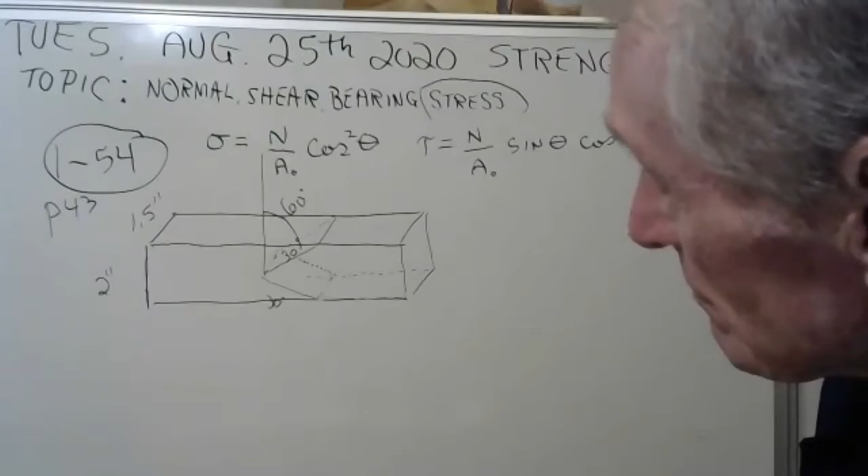And to make life easy, they've got 800 pounds here. I'm going to break this into 400 pounds and 400 pounds. Total's up to 800. And I'm just going to split this rod right down the middle. There we go. And I'm just going to get rid of the bottom part of it. I don't need that anymore. I got 400 pounds on that top part.

And so now this will be 1 inch, won't it? That's 1 inch. This is 1.5 inches. And we're doing pretty good. There's some dashed lines here.

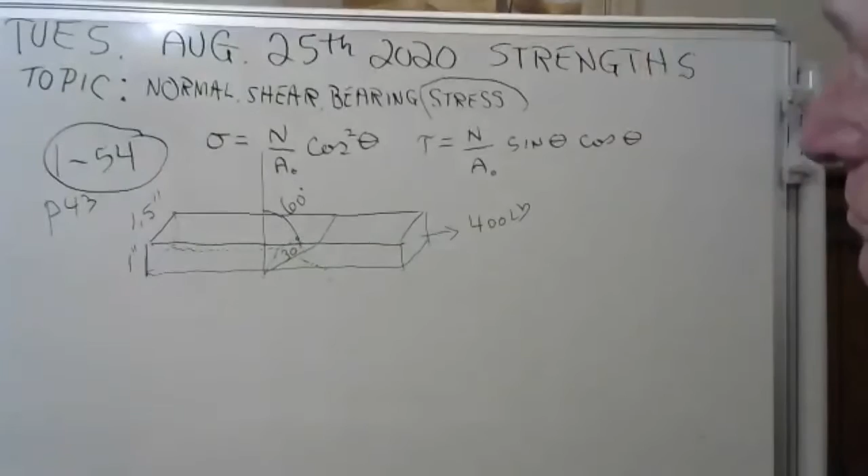Okay. And if you want the normal stress on that internal slant, it's going to be 400 pounds divided by 1 inch times 1.5 inches. That's the area. Times the cosine of 60 squared. That's it. And the shear stress will be 400 pounds divided by 1 inch, 1.5 inches, sine of 60, cosine of 60.

Okay, now we're going to get those and we're going to see what they are. Can you read all that? I think you can. I'm getting too hot, take this coat off.

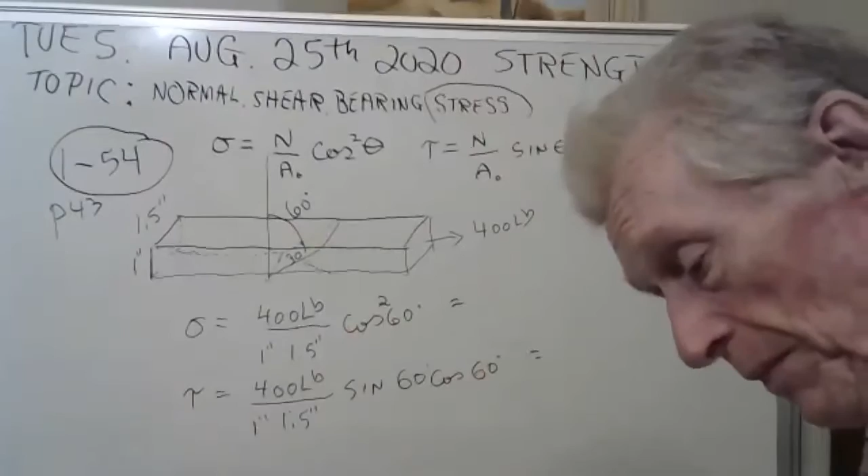Now I want you to do that. I want you to find the normal stress and the shear stress on this internal slant, okay? All right, here goes.

Well, I got an answer of 66.7 PSI for normal stress. And now we're going to do the shear stress.

I wonder if I did that right. I'm getting 115 point, rounded off to 5 PSI for the shear stress on that slant.

Of course, there's another slant. They call it a fish mouth weld. But on the surface of that weld, these are the stresses.

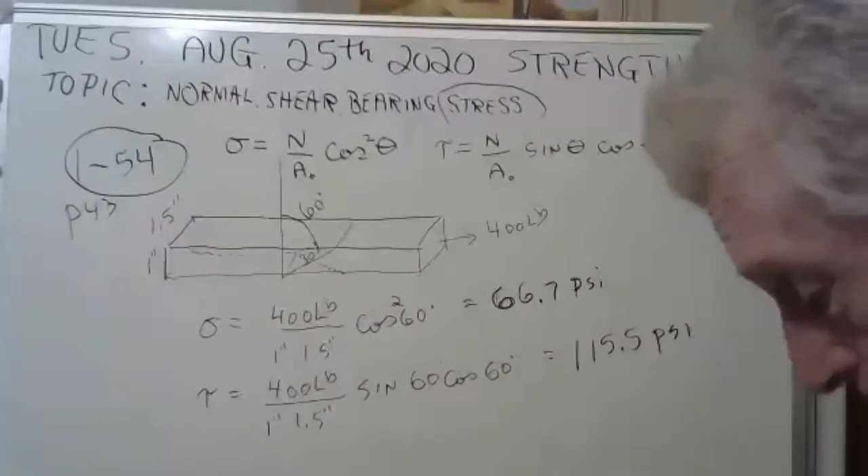Now let's see what the answers are. Go back here and look at 1-54. And it says... well, by Jove, it says 66.7 PSI. And for the shear stress, the book says 115. They didn't have a 0.5, but we can live with that.

So we've shown you that. Now you know that there's internal stresses inside a piece. Any comments or questions on that?

Okay. Well, let's just work a simpler problem. That was kind of tricky. But if there's no questions, we're going to do a simpler problem.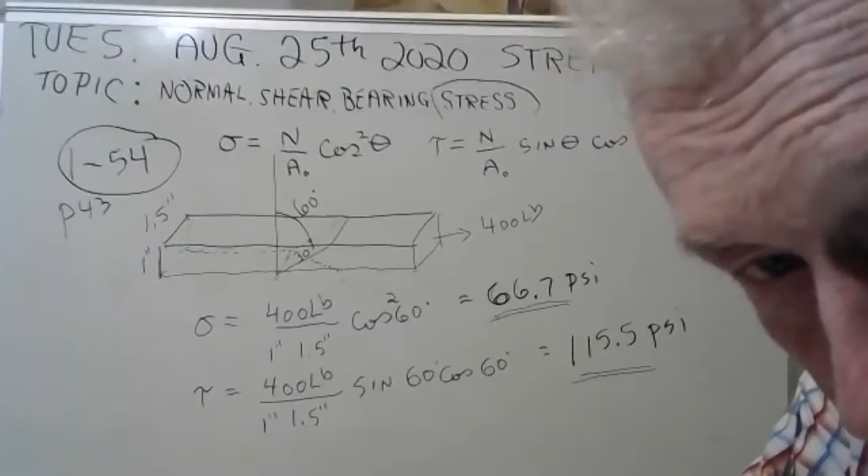I had never heard of a fish mouth weld. Do we have any welders out there? Welders, speak up. Let me go to my class roll here. Any of you, Shane, Samuel, Noah, Mohammed, Julian, you got any welders in the crowd? Speak up if you're a welder. Ben, Ashley, Alex, Nicholas. Nobody said anything. I don't guess we have any welders.

But anyway, we did a problem there. And we found an interesting equation. And you're going to write that equation down for me. Let's do a simpler problem, shall we? But again, we're going to be finding stresses. That's where it's at. This is problem F.

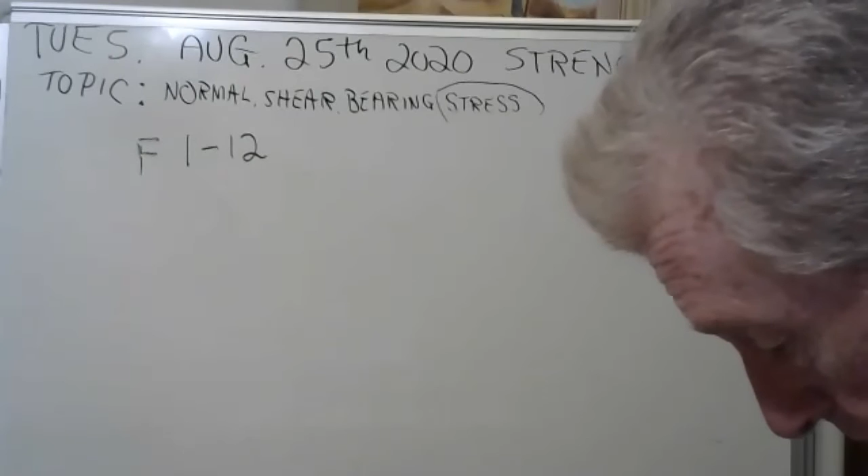Problem F1-12. Uh-oh, I don't know where it is. Can you help me find it? F1-12, trying to find it. Page 39. Did you say 35? 39. Okay, one of my excellent students says 35. No, it's not 30. Did you say 25? 39, 39. Thank you so much. Yeah, there we go.

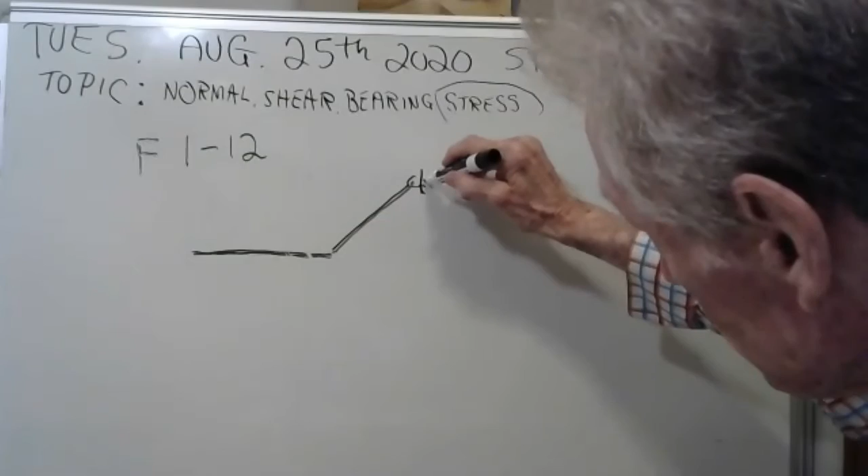Okay, well, we've got a rod here and another rod here. Now this is a 3, 4, 5. I didn't bring my big protractor in here, but I've got this little one. I can fake it. It's about like that. Now this is C here. This is A. And this is 50 kilograms.

And they said that the diameter of AB is 8 millimeter diameter. Okay. And this is a 3, 4, 5.

They said this is a 3, 4, 5 triangle. I want you to memorize the 3, 4, 5 triangle. Let me go through it. It's so important because teachers use this on exams all the time.

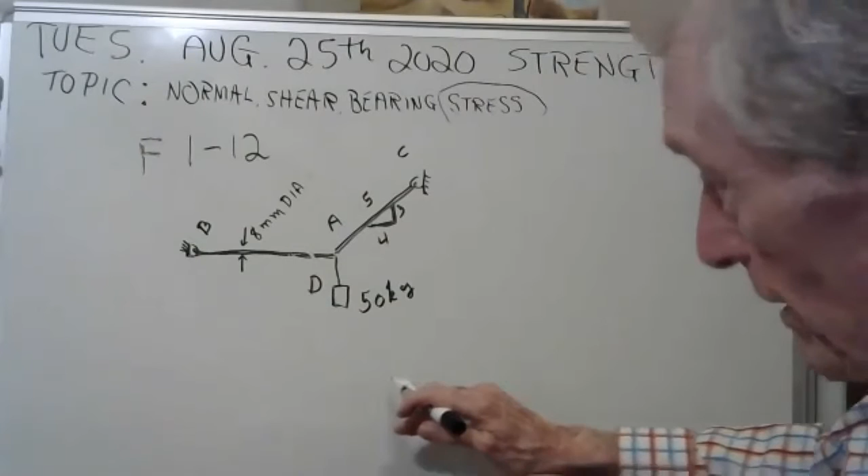If you have a 4 and 3, you all know you get 5 because 4 squared plus 3 squared is equal to 5 squared. You all understand that. And if you solve for this angle here, it's 36.87 degrees. Just look up the arctangent of 3 over 4, and you'll get 36.87. And this is 53.13 degrees. If you don't believe me, look up the arctangent of 4/3.

Okay? And memorize that. I don't want you to have to figure that out. I want you to know that by heart. Just like you know the 30, 60, 90 triangle by heart, don't you? The 30, 60, 90. This is 1, 2, square root of 3, 30 degrees, 60 degrees. You have that memorized, don't you? Well, don't you think it's about time for you to memorize the 3, 4, 5?

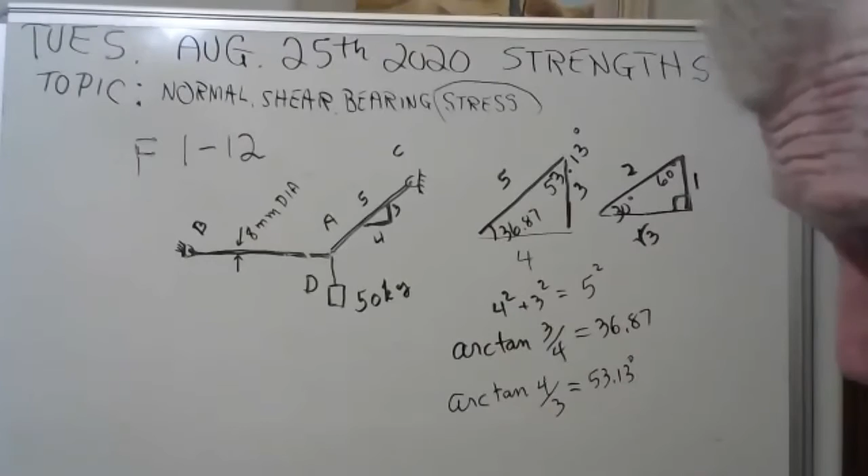Well, I think it is. Now let's work our problem. Now the way you work these problems is first you draw these to scale. Well, I actually measured that angle. I got my protractor out and I measured it.

And now we're going to put red stuff on here. We're going to put our newtons. So what's 50 times 9.81? That's 490.5. We know we have 490.5 newtons.

And when you do these problems, you look for zero-force, two-force, and three-force members. Well, this structure is a three-force member. Look, there's a force here. There's a force here. They all meet in a point, don't they? They all meet at point A. They call it the concurrent point. And see, these are all two-force members. Well, that's a two-force member, and that's a two-force member.

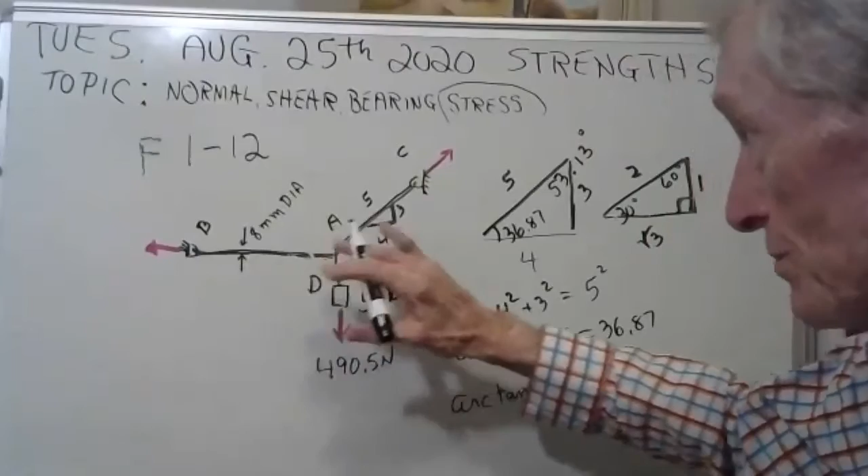Now what we got to find out is these external forces. First, you solve for external forces, and then you solve for the internal forces. Then you get the stresses. I think they want the stresses. Let me read here. Yeah. They want the normal stress in AB. Okay.

Well, how do you do that? You have to use these equations of equilibrium. You know these equations.

When you do this in the x direction, what you'll have is, call this force C, cosine of 36.87 minus B equals 0. See, there's two forces in the x direction.

Now we're going to do the y direction. Well, that doesn't have a y direction, but this does. It's C sine of 36.87 minus 490.5 newtons equals 0.

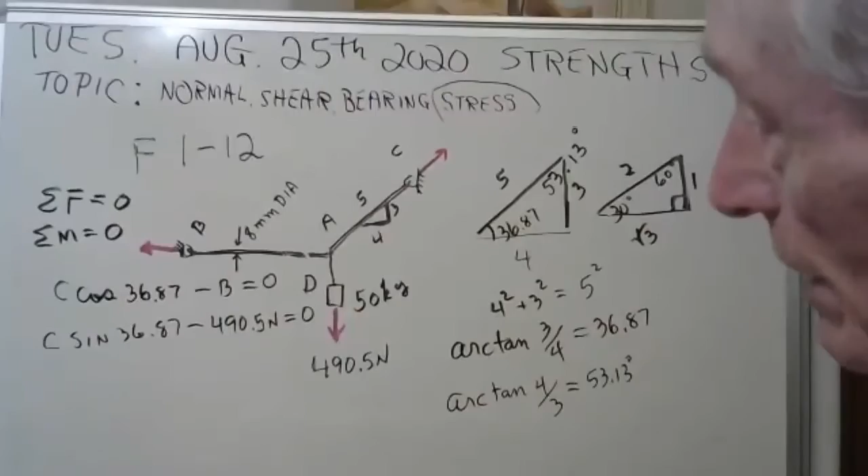Ooh, how nice, we can solve for C. Do you see it? Okay, let me solve for C. I want you to solve for C, and I'm going to solve for C. Here it goes.

Well, I got a value for C. Mine says 817.5 newtons. So we just figured out what C was, it's 817.5 newtons. And now we can solve for B because we know what C is.

So plug that in with me. Now I have B. My calculator says B is 654 newtons. Okay, well great, now we're going to give them what they wanted.

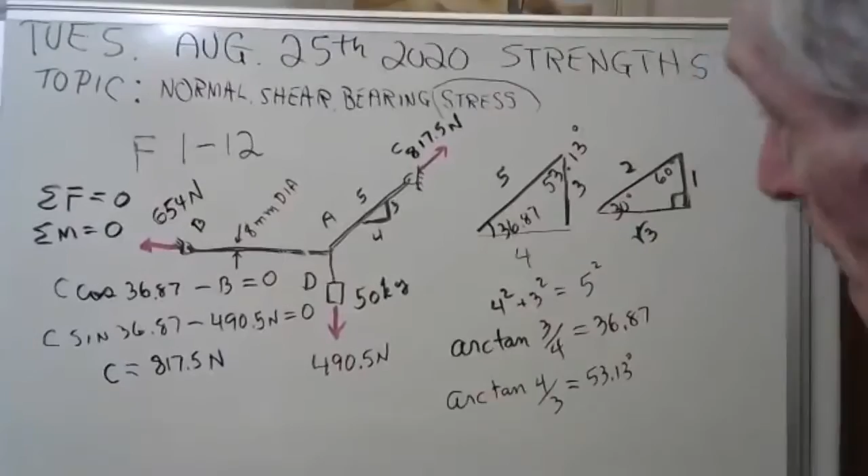They wanted the normal stress. We don't need this because you're going to memorize that for me. We're going to get the normal stress in AB. Well, it's 654 newtons divided by pi over 4, times 0.008 squared.

Okay, do it. Well, I got an answer. I'm getting a humongous answer. I'm getting 13.01 megapascals. I wonder if that's right.

Well, let's look and see. This is F112. They show you how to do it in the back. Let's look it up, F112, and we'll see what they said. They said the answer is the normal stress in AB is 13 megapascals. Well, that's what we got. Yeah, that's what we got.

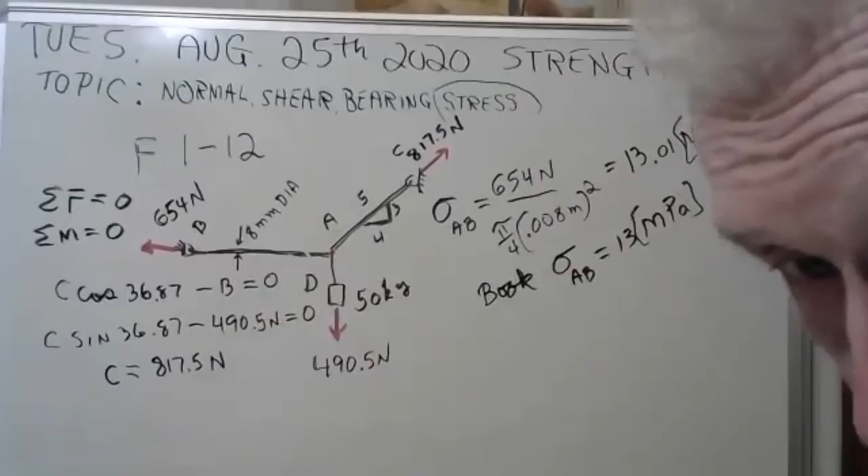Do you see the method? You draw your free body diagram to scale, you measure your angles, you put all of the external forces in red, and you solve for the external forces using the equations of equilibrium, and then you find the stress that they want. We did it, yay, we got it right. That's the method.

Do you have any questions? Here's your chance to ask questions.

Well, we've just gone over stress again. We learned something new, bearing stress. We learned about stresses internal in a tension member. It was pretty fascinating stuff. But I think that's going to have to do it for today until we meet on Wednesday at 9:30. And you got some homework there.

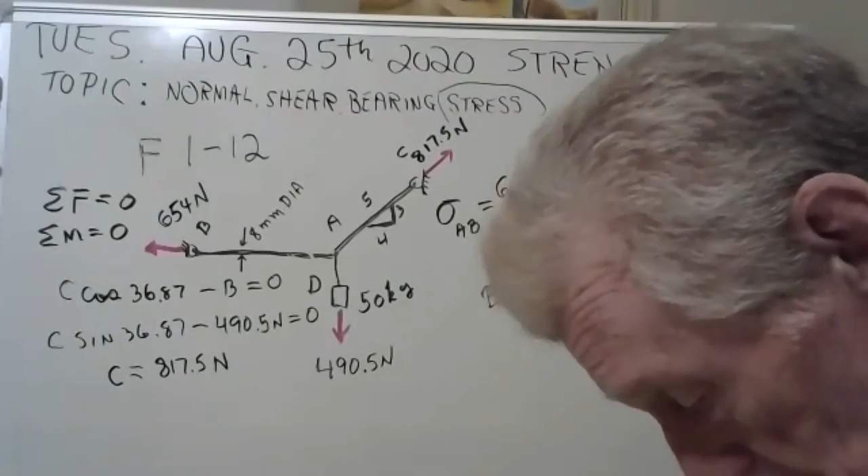Mr. Griffin, what page was that F112 on? Oh, thank you for asking. It was on page 39, I think. Okay, I found it. Good, page 39. Any other comments or questions?

The connections on B and C, they are not pin connections, are they? Yes, they are pin connections. So why didn't we do the normal thing, like drawing the components, like if it's a pin connection, going in the y direction too, can we do that here as well? Well, there is no y direction at B. Now at C, we have a y direction and an x direction, but there is no y direction at B, it's entirely horizontal. Okay, got it, thank you so much. Did that answer your question? Yes.

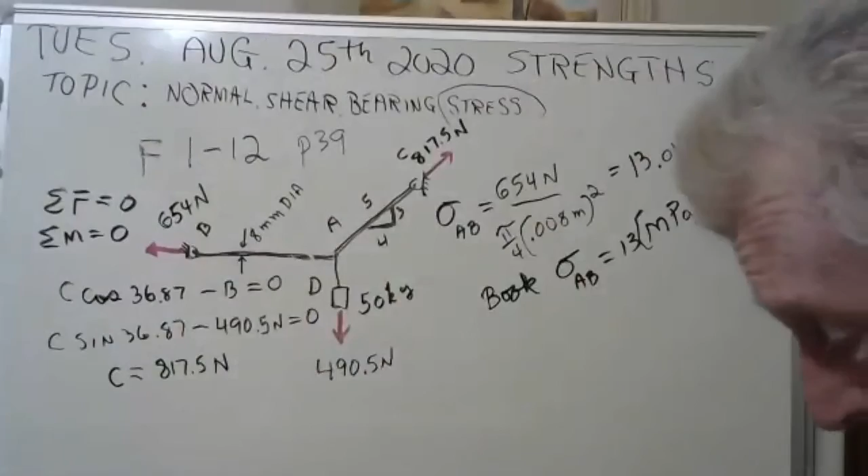Anything else from anybody? Well, okay, enjoy your homework. Now that homework, it's on Blackboard, let's see what it was. You're supposed to do 178 and 186, and it's due the 28th. Well, when's the 28th?

That's Friday. So you got, no, that's not right. No, that's right, that is right. It's not Friday. It's, yeah, it is too. Your homework is due Friday, it's on Blackboard. You guys have been doing pretty good. I need to finish grading some of your homework. You're doing good, I'm the one that needs to get busy and not be too lazy.